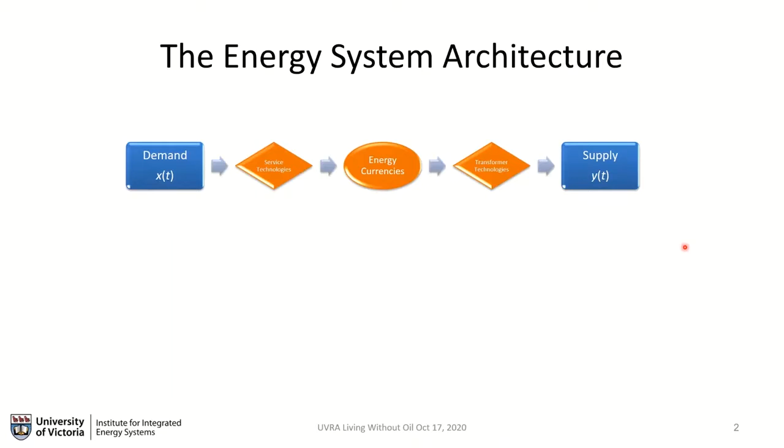So storage, right? What about storage and where does it show up? Well, storage has always been part of the system. And you know how it is. When you get familiar with something, you don't see it anymore. At least that's how I am. I don't see all the renovations in my house that I've not finished because I just don't even notice it anymore. So same thing with storage.

We can think about storage as a way to accumulate a stock of something, right? It could be energy, it could be material, it can be money. And we've built our system of storage. It's just that it's been provided to us in some form. So before we went into the fossil fuel era and we relied on biomass, biomass was intrinsically stored in its form. We could harvest that biomass and put it away for when we wanted it. Food, same thing. We farm in the summer, we put the food away so that it's there for us in the winter when we don't have that productive capacity.

And some examples of storage in this picture: our hydroelectric system would use a reservoir to store water, and we run that water through that technology, which would be the generation unit in the dam, to make the electricity. And that would go down the pipe and maybe get to your house, and what's the next storage it might encounter? It might be your hot water tank, right? So we have a conversion of electricity into hot water, which is in a stored tank, so we can use that when we want, and it also has some benefits in terms of the amount of capacity we need.

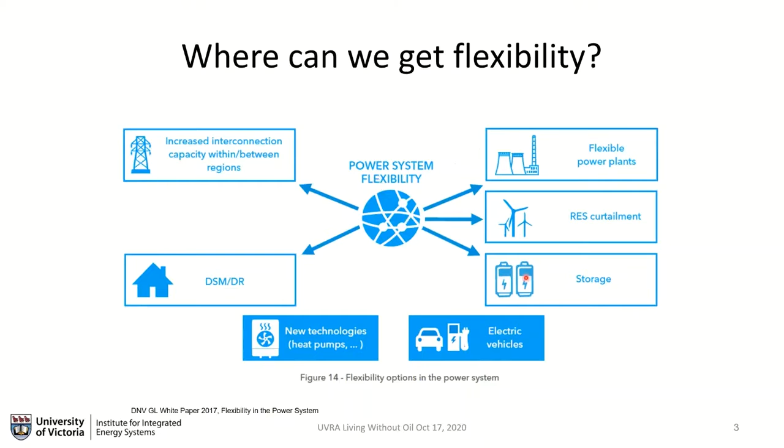Okay, so flexibility was the term I brought up to help describe this challenge, and there's all sorts of different ways to help manage flexibility. But the one we obviously want to drill down to is storage, and grid storage primarily. Storage for vehicles I'll touch on a little bit, but it's not the primary focus. We're really going to talk about various ways that we can store electricity for grid services.

And what this figure on the left is showing is kind of a breakdown of the types of service we want in the electricity system based upon the power requirements and the storage time. Those are really the two primary characteristics we would need to define storage. How much energy, how fast do you want to charge and discharge? And there's other parameters we'll come to eventually, but that lays out this map of the different regions in which the electricity system is trying to manage reliability and control, sub-second all the way up to seasonality and annual variations.

So you can see this really short time frame stuff is in the power quality realm. We get up into longer stuff and we get into transmission and distribution deferral. And then there's a big green bubble in here that covers basically everything, and it says renewable energy management. If you look to the right, I'm sorry about figure quality here, it's a similar axis layout. And what's laid over top are various technologies that might be used to serve those different grid demands.

And the colors represent hydrogen-related, mechanical storage, you can think flywheels, electrochemical storage, electrical, maybe supercapacitors, and thermal storage as well. So there's a variety of physical mechanisms we can use to store energy. And the one that's getting the most interest these days and is really becoming transformative is the electrochemical. Yeah, but let's quickly talk through some of the...

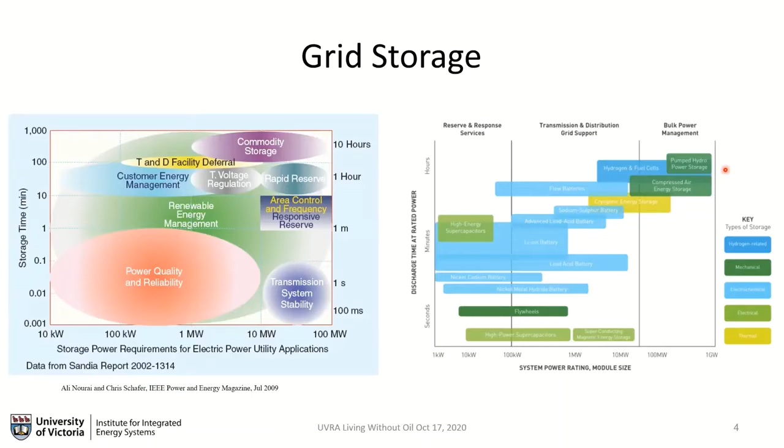Andrew, could I just interrupt for a second? It's John here. It seems that the audio gets a little staticky from time to time. And I'm wondering if it's anything on your end, or if it's just life. I don't know, I'll just draw it to your attention. But okay. Yeah, no, of course, I'm hearing myself perfectly. So. No, it's difficult to know what to do. So thank you, but carry on.

So I want to quickly talk about some of these technologies. Some of them are fairly obvious and are deployed right now. And pumped hydro is probably the first one to talk about, since it's pretty simple and it works. The thing that's interesting about pumped hydro is it's fairly simple, it works, but you do need to have the geography to make it work. And not a lot of places have that.

We certainly do. And where we have the problem in BC is we have a lot of generation very, very far from where the major load center is, being Vancouver and Vancouver Island. But if you look at Vancouver, there's certainly geography that appears to be suitable for pumped hydro. And if you had a large pumped hydro facility near Vancouver, that means I can actually reduce the amount I might invest in transmission infrastructure because I can better utilize it.

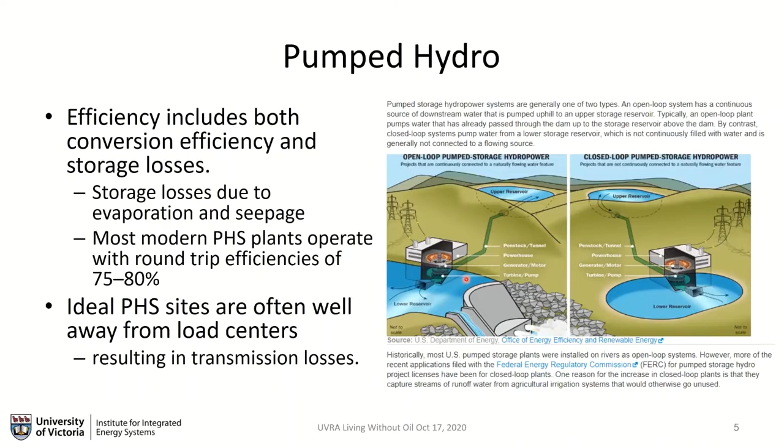Anyway, there's a couple of basic types where you have two reservoirs, an upper and a lower, and you can move water back and forth and store it in the upper and make the electricity. And then there's this open loop system, which is an upper reservoir, and then you feed into a river system or something like that. And their efficiencies are pretty good, but it's like any other large capital thing. There's a lot of investment to build these things, and there's a lot of footprint associated with them in terms of landscape, and there's also the geographic constraints. There's quite a bit though that exists.

Again, in the U.S., you can see they built a lot of pumped hydro back in the 70s. So this is what this figure is showing, essentially built capacity as a function of year. It died off after the 70s and 80s growth, when electricity demand was going crazy. And you get a rough sense of the storage associated with these pumped hydro facilities, the actual energy, and then the power rating. These are two important pieces.

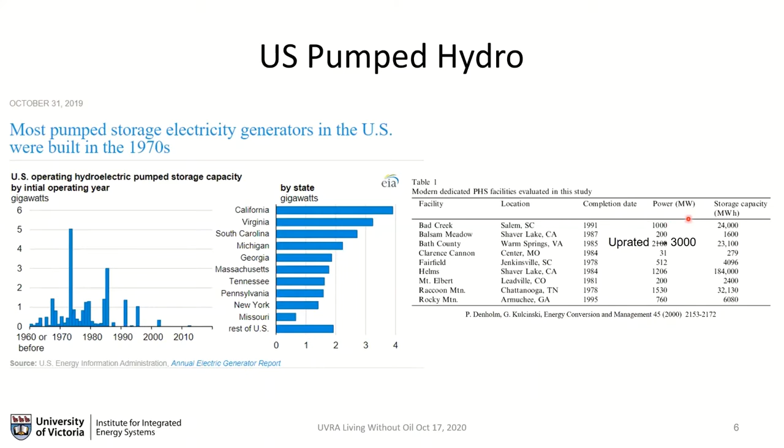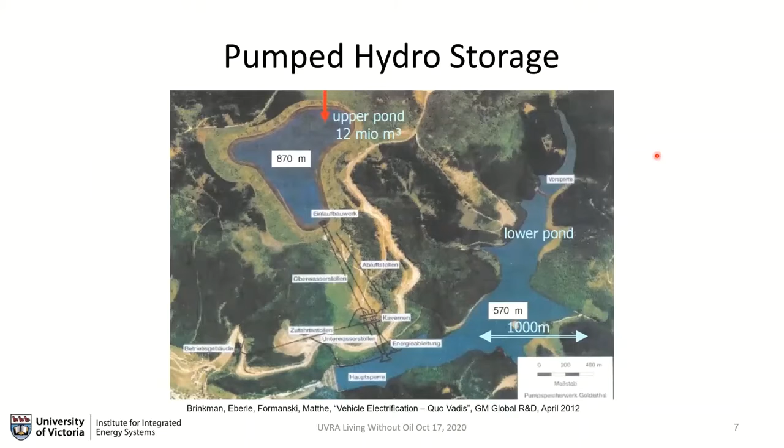What does it actually look like? Well, this is a bit of a fuzzy picture of a pumped hydro facility in Germany. This is where you've got a lower pond and an upper pond, and back and forth it goes. Now to show you the storage scale of that pumped hydro facility, we're going to lay it on actual data from Northern Germany wind farm production.

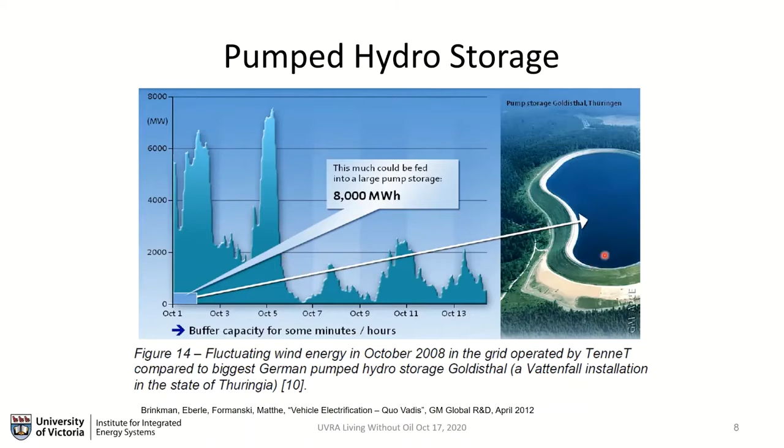efficiency. So that pumped hydro storage plant picture, the footprint you saw there, and this is a better photo of the upper reservoir. The energy and power rating on that is roughly this blue bar. Okay, so what is that meant to say? Well, it's meant to give you a sense of the footprint and the scale that might be required to have a really significant impact on this profile. If I wanted to level this profile, and that's probably not something you want to do, but if you imagine you want to level it, that means store and dump. You're talking about a pretty big footprint if you're going to do pumped hydro.

What else might you do? Another form of storage that is used is what's called compressed air energy storage. On this one, we have to be a bit careful, because the typical compressed air energy storage is not really a true storage technology. It's a hybrid. It burns natural gas. It's probably better to call this a very high efficiency gas plant. But it does use a storage mode to do that, and the diagram shows how it might work.

You have some excess electricity or low-cost electricity that you would use to drive compressors. You fill up your storage reservoir, typically underground, and then when you want to actually produce power, you extract that. What this has done is reduced the amount of compression you normally have to put into a power plant, and you get a much more efficient plant. So this heat rate is an indication of how good it is. A heat rate of 3,800, if this is BTUs per kilowatt hour or something like that, that's probably half of what a typical gas plant might be.

And the nice thing about them, the footprint can be pretty small because it's an underground storage reservoir, so you can just have a hole outside the site of a mine, and they're fairly responsive. They can act pretty fast.

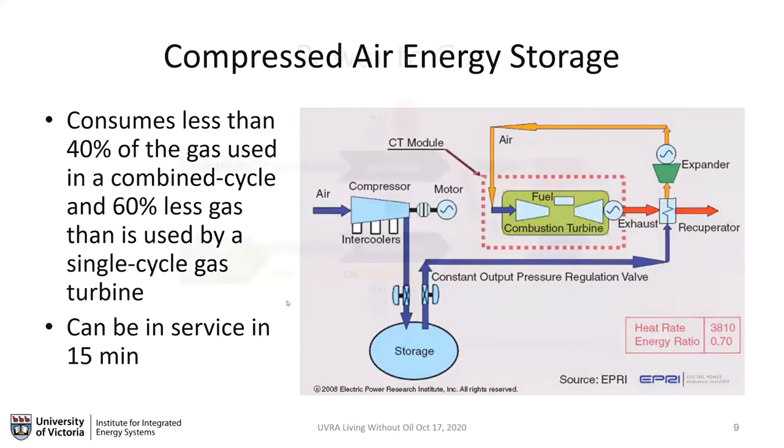What else can you do? Well, you can make hydrogen, right? We can make hydrogen using excess electricity through electrolysis. And you can do a lot with hydrogen. You can feed it directly into vehicles. You may feed it into the gas grid. You can also take hydrogen and make methane. This is called methanation. And this is another way to do storage.

And there's losses that go into doing this. There's losses in terms of the conversion process for electrolysis. There's losses in making methane with hydrogen and CO2. But this is, again, a system problem to try and understand its value. There is obviously an energy cost and a capital cost to build this stuff, but it produces a currency that we have a built infrastructure to support.

So the value proposition here is, maybe we're going to pay for this, and the efficiency is not going to be great, but the direction we're going is that electricity is getting cheaper, so I don't care as much about efficiency, and there's a lot of infrastructure out there that delivers energy using gas, and to repurpose it, that costs money too.

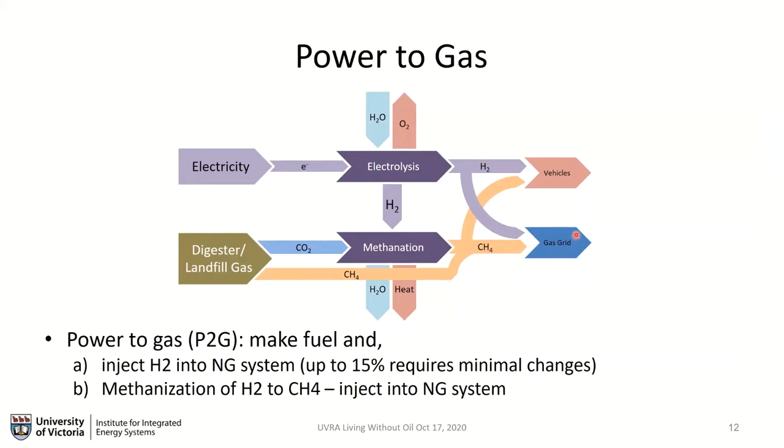So if I can actually put in a molecule that looks no different, then perhaps there's the real value to this. This is early days, it's getting looked at in Germany mostly, but it's an interesting proposition. And one of the reasons for it is methane, I'm not saying natural gas, I'm saying methane, because it could be made renewably.

And hydrogen, made renewably or cleanly, can store a tremendous amount of energy. And again, using underground formations like a compressed air energy storage system, and this is supposed to be a cutaway to kind of give you a sense of what this looks like, is basically vertical shafts. And in certain regions, you can make these storage volumes fairly easily. You drill a hole down into these formations where you have essentially salt that can be dissolved by pumping water through, and you can create very large caverns which are very gas tight. And this is done now for natural gas storage. A lot of this is in the US, so this isn't new technology. We know how to do it right now.

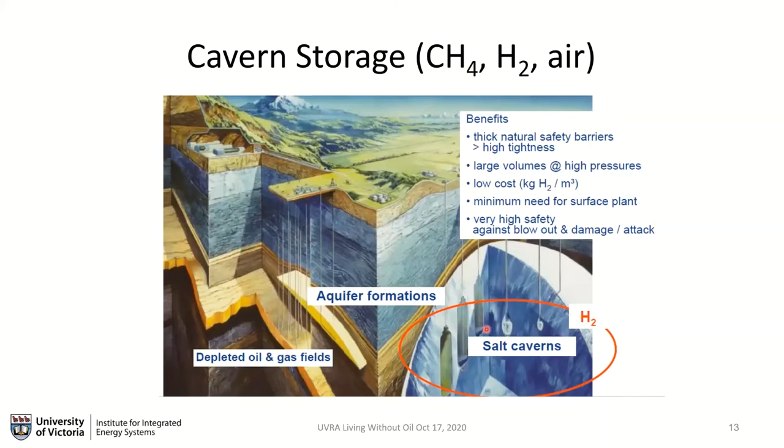And there's also the use of depleted oil and gas fields, so that's an interesting one when we talk about BC and Alberta. And what does this mean if we do it? Well, a representative storage of making hydrogen, putting it into some salt caverns, and these salt caverns are, volume-wise, two of them together would be about equivalent to the compressed air energy storage system that you'd find in Germany now. I'm just trying to give you a rough idea what this could mean, and it's the same profile with 2 gigawatt rated power, and these volumes of storage at typical storage pressure. This is the quantity of energy you could store.

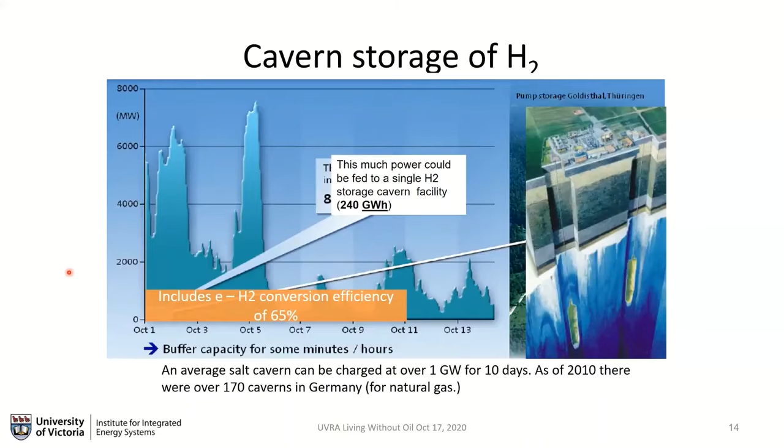So this is the beauty around any chemical energy carrier, is the high density storage that goes with it, unlike physical forms such as kinetic energy, flywheels, or potential energy, pumped hydro. And I'll show you this in a second, comparing a lot of different modes, but this is one of the real attractive things about chemical currencies. And you can get more elaborate.

So this is a diagram I stole from Audi. I think it's Audi. Anyway, car company, which was saying, look, we're going to keep building some pretty awesome cars that are still going to use internal combustion engines, but we're going to do it so it's sustainable. And to do that means a combination of electrolysis to make hydrogen, capturing CO2, making a synthetic hydrocarbon from it, and this time a liquid, which would go directly into existing infrastructure one more time. So I'm trying to guess when I grabbed it, oh, okay, there you go, and so in 5 years, there's been so much change. I bet you Audi doesn't have this image up on their website anymore. It just might not look as compelling. What else can we do?

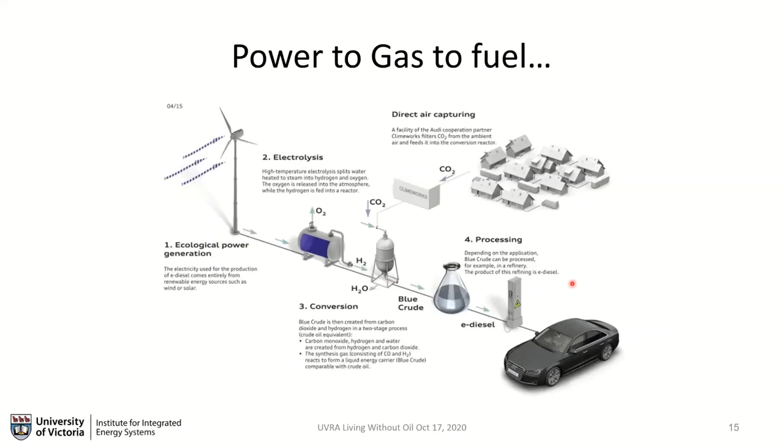John, well, it's John again, Andrew. It's John again. I don't know if there's a way of checking your microphone, but is it possible that something could be rubbing against it? Because we're getting a little bit of static from time to time. It's not overwhelming, but it's a little disrupting. Let me just look at my wires here. It all looks normal. Yeah, it seems to come and go. However, there's nothing we can do about it, I don't think. So we'll just carry on. Sorry about that. No, that's fine. Fine.

So, thinking about footprints, thinking about the form of storage, thinking about densities. A proposal right now that is getting some traction in the UK is using air. So you can store energy by liquefying air or compressing it, but liquefying it, you can actually store more in a smaller volume. And this is not that difficult to do. We have been doing liquid air. Air liquefaction is probably what started the industrial gas age. Liquefying air was happening pre-1900. Wasn't great, but we could do it, and that's what kicked off companies like Air Products, Praxair, and the other major ones, is their ability to liquefy air and separate it and produce usable industrial gases.

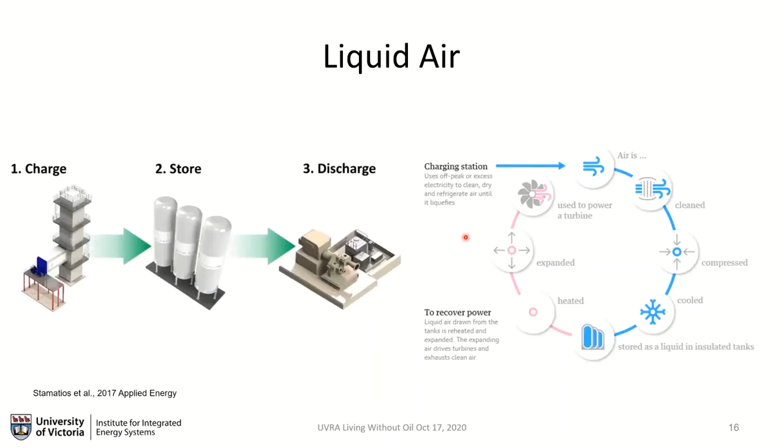And then we've got electrochemical systems, and the one we're all used to is storage batteries, right? Secondary batteries, charge, discharge, which are everywhere right now.

And there's also costs that go with these. The cost of a cell will be a lot smaller than the cost of a pack or a module. So I can take cells and assemble them into a module. I can take a module and assemble them to a pack. So when costs are being quoted, you have to really pay attention. What are they talking about? Is it the final pack? Is it the end use technology? Is it the module, cell? Really important to pay attention to that, and that is not often clear. So unless you're really tracking things, you may see a number that is somewhat deceiving.

This is also true for, I think, Tom Tiedje's talk next week about solar. This is somewhat true with solar. Are they talking about a module, like a single module that would go into a panel? Or are they talking about a panel? Or are they talking about a system? And those things can vary, and you'll see some amazing cost curves for solar modules that have gone way down. But when you look at a total cost, which includes, say, 5 or 6 other things, there comes a point when the module cost is somewhat irrelevant. Your costs are dominated by the other pieces, and those are the ones you need to start looking at, or you need to start paying attention to the assembly cost or the full system.

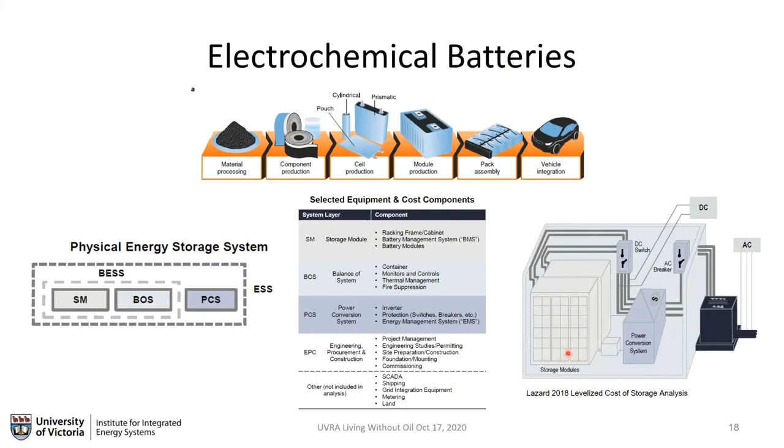Another type of battery, which you may have heard of, is a flow battery. A flow battery is kind of like the daughter of a fuel cell and a secondary battery. It's got characteristics of both. I don't want to spend a lot of time, but a fuel cell essentially has a power stack that you feed in your energy carriers and you get electricity out. That's what the center would be. This is just a single cell, and you can generate electricity through the electrochemical reaction with these 2 half cells. But with a flow battery, that energy storage mode is actually in the electrolyte you pump through. And so you have these external tanks that would store the electrolyte and store the energy. Unlike a fuel cell, which would have, say, a gas, and unlike a battery where the energy is encased within the electrode structure within the battery itself.

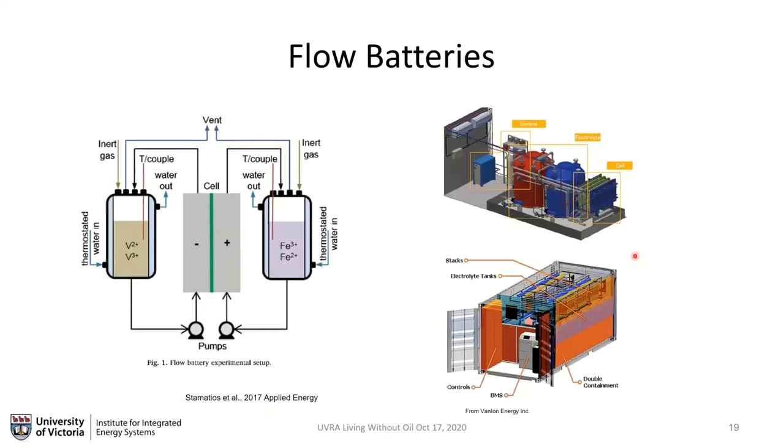And what you see on the right side is the sense of scale. This is a standard shipping container size, and the proposed flow battery that would go with this is roughly 500 kilowatt power and 2 megawatt hours. So you can imagine a truck dropping this off somewhere, and then you could plug into it and you'd have a storage system which you could charge and discharge. So that's a survey of a select number of technologies.

There's a lot going on in this figure that I'm talking to right now. What I'm trying to show you is various ways to store energy. Top is liquid hydrogen, hydrogen compressed to 1500 atmospheres. And then you see more hydrogen at various pressures. Methane compressed, liquid methane, or liquid natural gas, gasoline, ethanol, methanol, flywheel, nickel metal hydride batteries, lead acid batteries, liquid air, compressed air, elevated water. So these are various physical modes that I've just reviewed. And what we see are 2 really important characteristics: the energy density in terms of kilowatt hours per unit mass, and the energy density per unit volume. And there's a blue bar and a purple bar, and there's some slight differences there to talk about delivered energy versus stored, because there's some efficiencies.

And it's not important to focus on the numbers. What's important is to just look at the ranges, and you can see again why hydrogen has this compelling aspect to it, or gasoline, and why gasoline is just such an incredible energy vector. The volumetric energy storage density is really high. And so you think about anything where volume and mass is important. It's got a pretty good mass too.

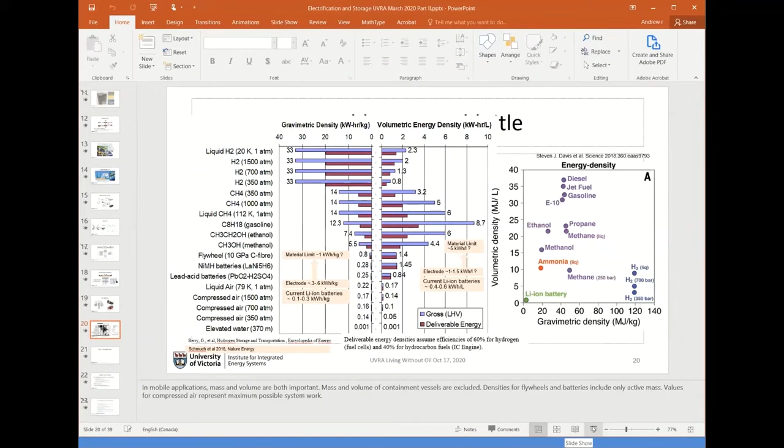Okay, so just to help again with some of that context, I've got one more figure that's basically the same. It's just in slightly different units, and it has lithium-ion batteries on it. So lithium-ion in terms of gravimetric and volumetric is way down here in the corner. And so it's a great technology, but when we start to think about electrification and where we might use a pure battery that's like lithium-ion, we need to start to pay careful attention to what the demands are really like.

And I know we had a lot of talk here a couple of years ago from Harbour Air about electric flight. And there's certain places where that certainly seems feasible. But when you start to talk about the Vancouver to Toronto run carrying 130 passengers, it's not going to happen on this battery. And even at the material limit, so what I've shown on the left here, it's hard to imagine flying airplanes like that.

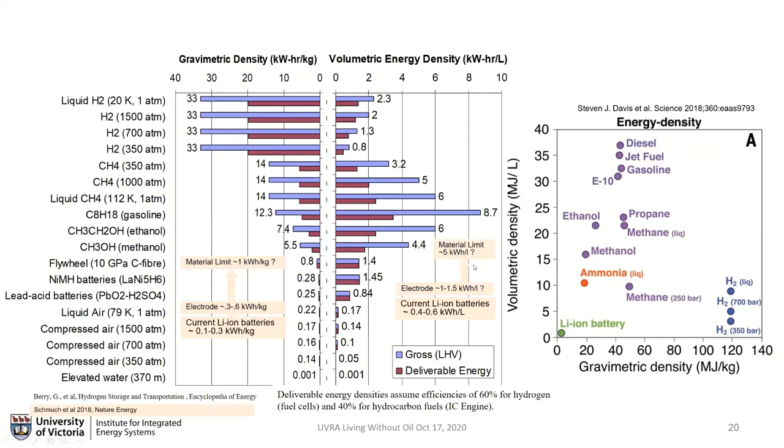So we really do need to think about how electrification works, and maybe it's the indirect electrification path where we have to synthetically make fuels. I talked about a supply curve for electricity. We really have a decarbonization curve, which we could order in terms of cost, and we do all the easy things first before we start getting into the really hard things.

Okay, I'm going to start to wrap up here. I know this is a lot of information, but it's really important to talk about cost a little bit and the idea of value. And these are tricky. Right now, storage looks like it could offer a lot of value. And the trick is, can the value justify the expense? What we're hearing about these days is trying to use what's called value stacking, multiple use cases as a way to pay for the installation. It means you need to find ways to get paid for service in multiple ways, and it can be done. And so where can it be done?

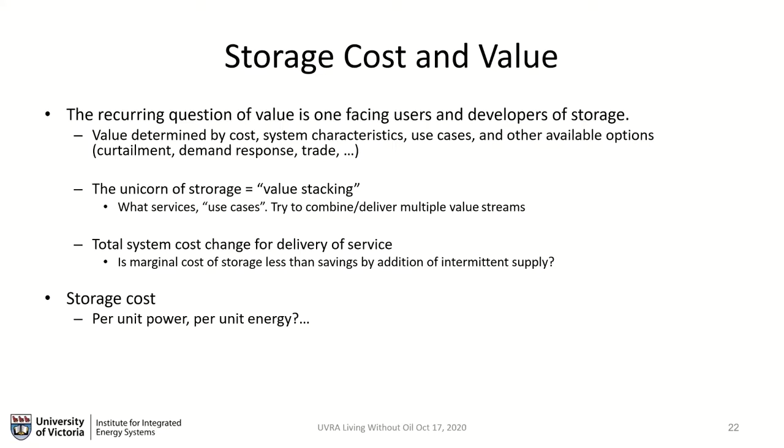Going back to that figure that shows the grid and its requirements, the vertical axis is discharge duration and the bottom axis is number of cycles. This is really a map or a template that lays out the various places where storage, discharge duration and cycles is really about storage, and the types of services that could be served in the grid.

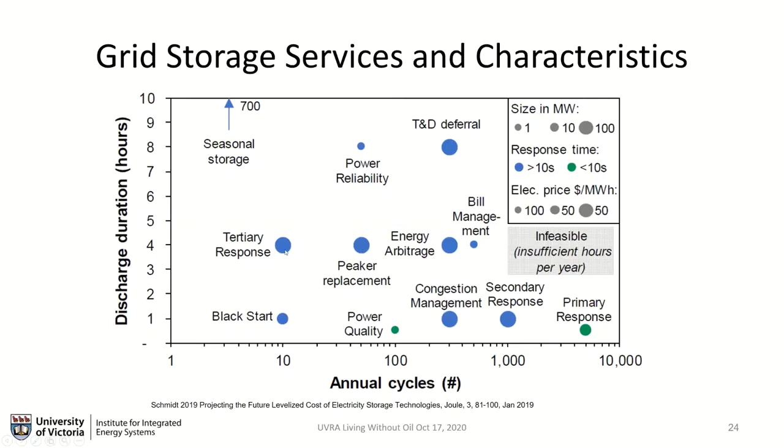And you can see bill management, transmission and distribution deferral, power quality. So where do you want to try and put storage, for what reason? And then you need to look at what that means. So what that means is what will be the operational profile I'm looking for from a storage system.

And this is a fairly recent collection of essentially learning curves showing different storage technology costs as a function of experience. So learning, basically any sort of technology that you build lots of, you learn and get better at doing it, you reduce the costs. And in this case, we see storage. So the learning is shown by the cumulative installed capacity in terms of gigawatt hours energy. And then the vertical axis is the price. Okay, and this is in dollars per kilowatt hour of storage capacity.

And we've got a number of different technologies, and I wanted to highlight again, the symbol shape is important because it reflects, is it the system, the pack, the module, or the cell itself? Okay, so let's go down this and just pick a couple. There's pumped hydro. So pumped hydro's been around a long time. It's generally a fairly large storage technology when it's built. So we get far out to the right of the axis pretty quickly.

And you can see pumped hydro, what this curve suggests, there's not a lot of data points, but it says this technology is mature. We're not seeing that downward slope. Basically, there's not a lot of room left to improve it. So mature technologies, here's another one. What do we have here? This is lead acid battery. And again, lead acid battery, we've been building those for a very long time and building lots of them. And you see, it's got its ups and downs due to commodity price changes over time, but it's fairly flat. So that suggests that that's a fairly mature technology.

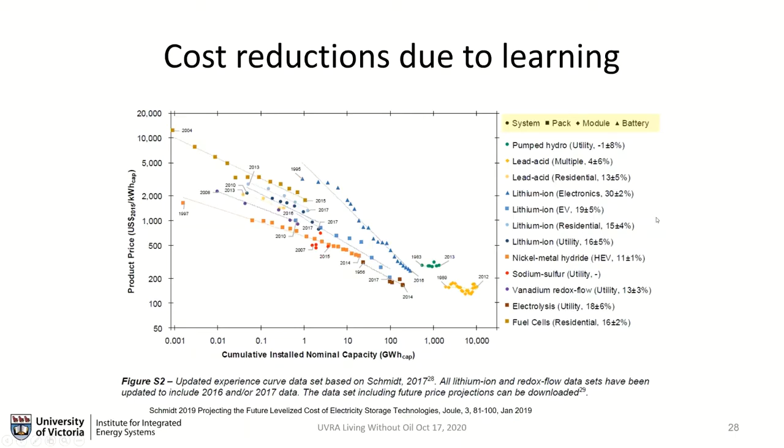So if I've got a cost, what does that mean for value? And what I want to try and get at is, so levelized cost of energy for electricity supplies, the analogous number is levelized cost of storage. What is the all-in cost to provide storage per something? What do I levelize it by? The amount of energy delivered, or by the amount of power I've got available from it? Well, there's a lot that goes into figuring that out.

You don't know what they're talking about. Or power, is it the power rating of the battery or electrochemical device? Or is it the power that actually is available to the grid? And then there's also ancillary services, which we don't have time to talk about. What goes into determining this are some techno-economic parameters. So the rated power of the system, rated energy, depth of discharge, number of cycles per year, and every technology has some sort of degradation. So how fast does it degrade, and what's the efficiency? And those things will vary as a function of cycles and depth of discharge. So this gets really complicated.

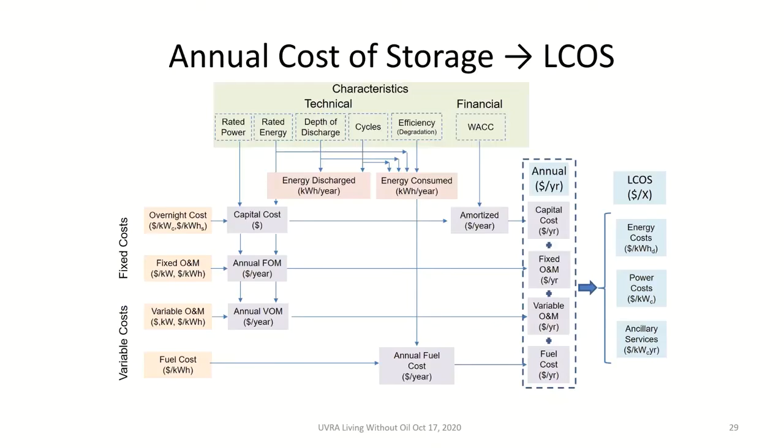Batteries will not look the same after a year or 2 years, and they can be very different depending upon who's been using them and how they've been managing the state of charge. So this gets much more complicated when you actually try to get into looking at the grid and understanding how you might present a business case to the grid.

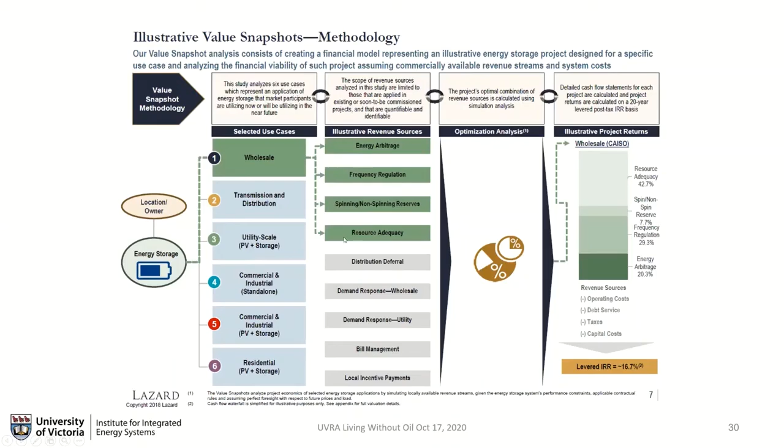But what we see here is essentially a picture of how the consultant group Lazard would go at this. And they do this now on an annual basis. They put out a report saying what's the state of the storage technology world and where do we see value, and what we see happening is looking at different sectors and looking how a technology might value stack. It can get in and get paid for certain types of services, and not just one, hopefully a lot, so that it can recover costs.

So that's all getting complicated. Let's back up and make it simple. And I'm going to back up and make it simple by going all the way back to California and a house in California that has solar. This is something that you're going to talk about or learn about next week. And this is a lot of what's happened. When I showed you California's net load and the solar, there's a lot of residential storage that's been installed.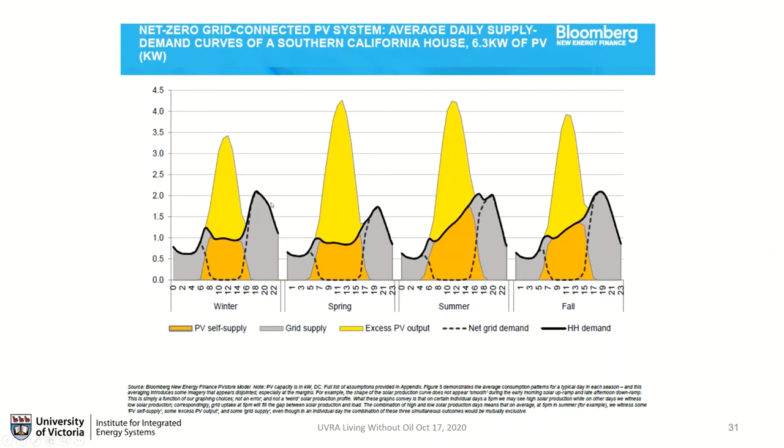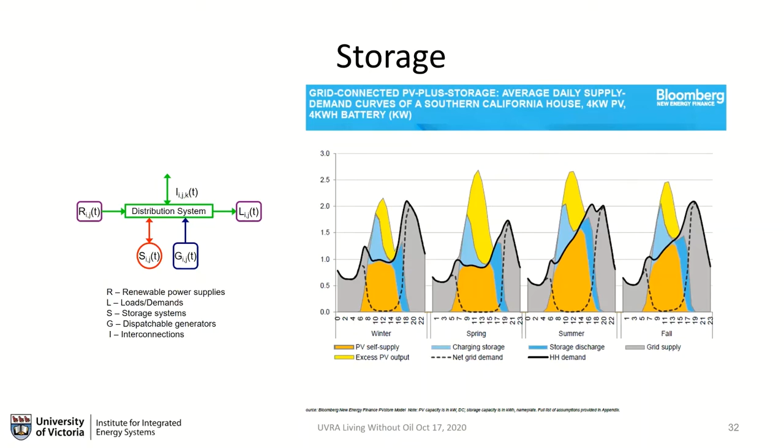What's tricky, though, is still trying to understand who it helps the most and where it's the preferred choice. Because typically you don't buy something because it's the only thing. Usually you have a choice. And you may decide, why buy the PV and battery? Why don't I just buy my electricity from the grid, right? That's what typically would happen. And so this is tricky because obviously there's maybe some carbon angle that we want to go after, but people have a finite amount of money, and so they typically want to spend it wisely.

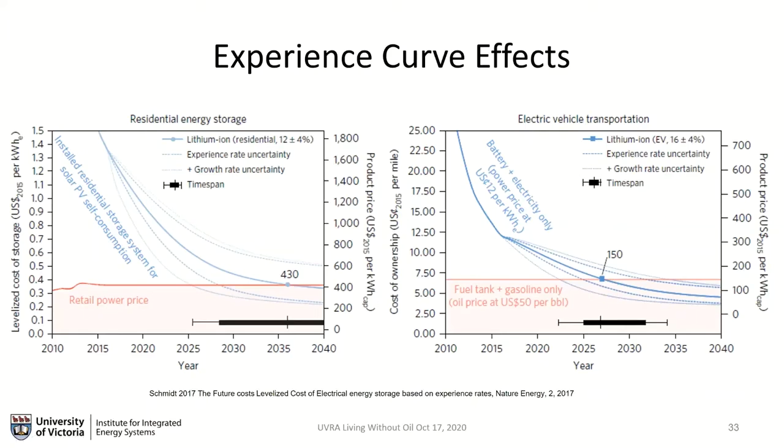This is comparing just pure fuel tank and gasoline against battery and electricity, a battery pack and the electricity purchase price only. And the error bars on this show we're pretty well at parity for this particular location. And this can be done for anywhere, and you'll get slightly different, or maybe not slightly, maybe a lot different outcomes. I'm just about done, and then we have a bit of time for questions.

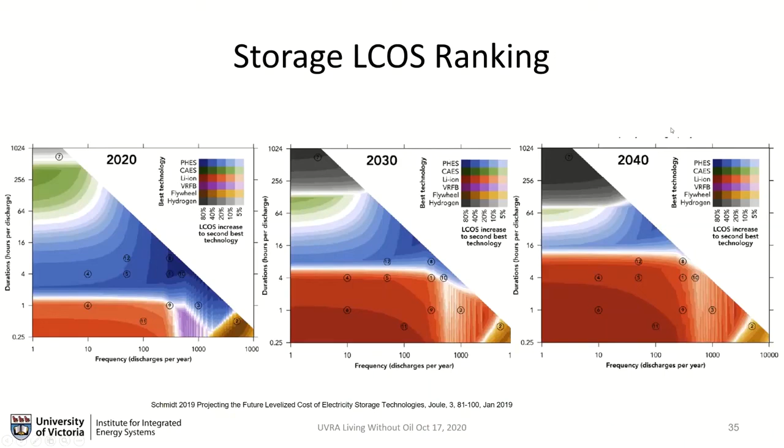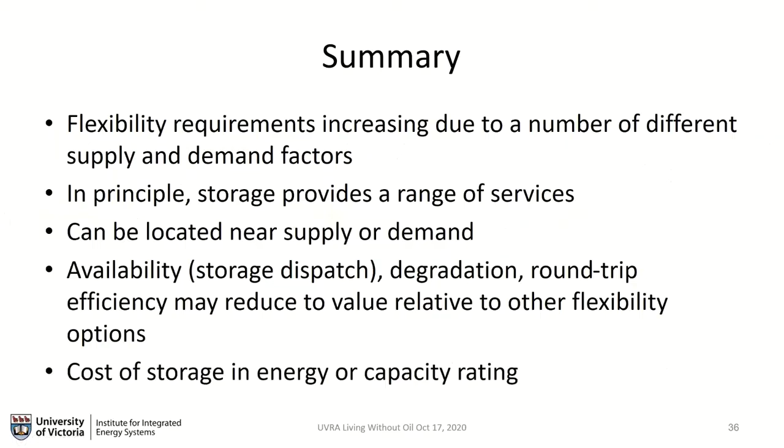So really interesting times and interesting place to be operating if you're into storage and electrification, energy systems. I find it fascinating. And I am going to just wrap this up, and hopefully we've got time for a little bit of discussion. That was a huge amount of information. Like I said, last night I was feeling good about